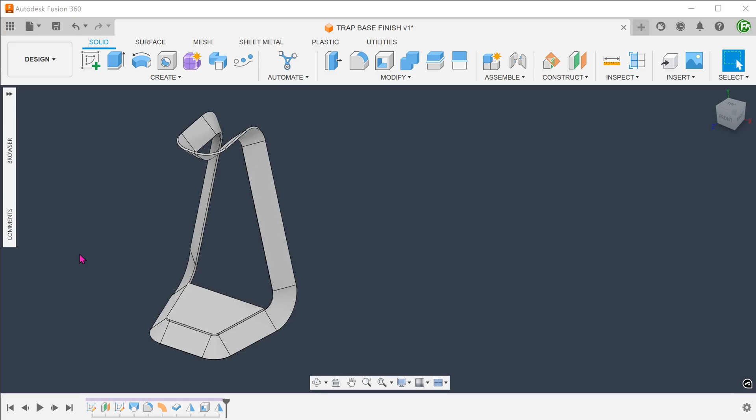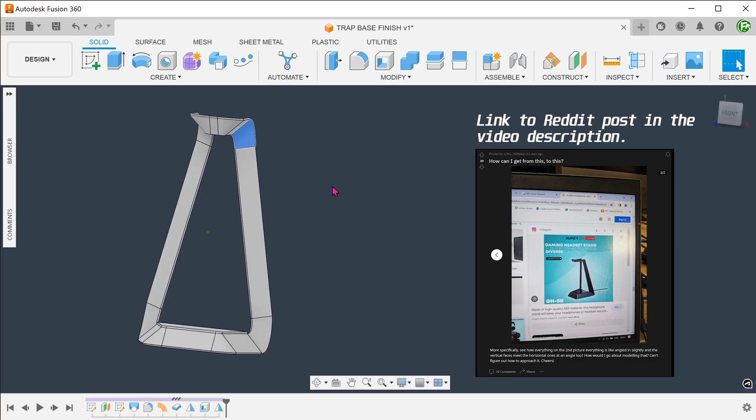In this video, I'm going to attempt to create this headset holder. The main challenges here are the trapezoidal base and these beveled faces. I'll be showing two methods here. Both these methods can only create an approximation of the shape shown in this picture. So do treat this video as an open discussion.

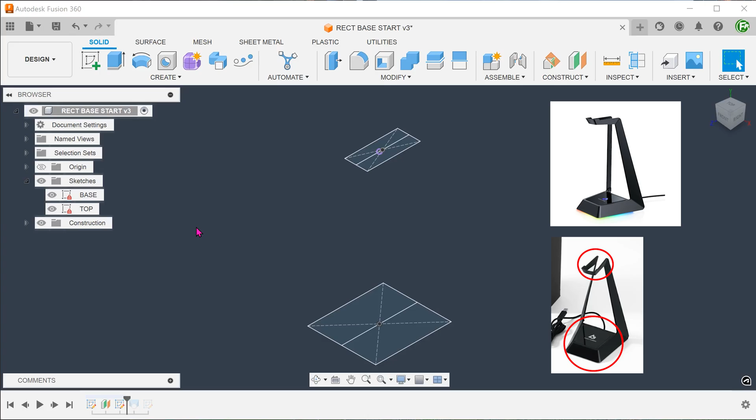For the first method, I'm going to start with a solid loft as a main building block. It has a trapezoidal base and a rectangular top. But if you were to loft from a trapezium to a rectangle, you will find that this produces curved side faces. I decided to simplify the model by going with a rectangular base. We will be taking a look at creating a trapezoidal base in the second method. By lofting from a rectangular base, the side faces will be flat.

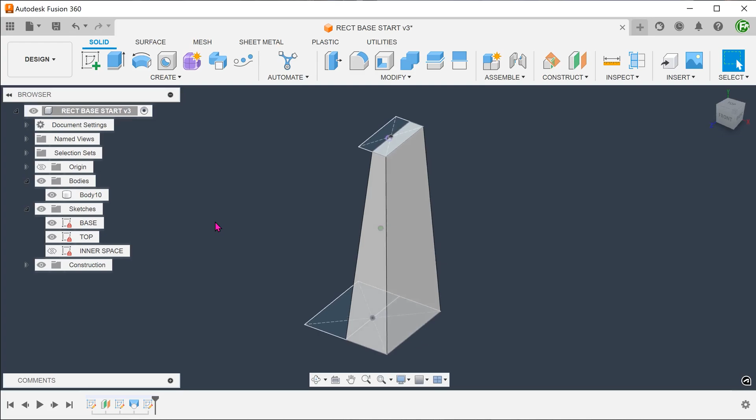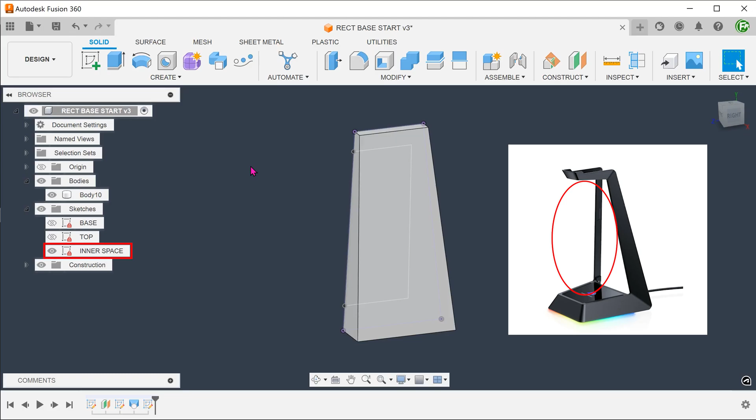It is better to create half the model and mirror, so I have created a loft here that uses only half the rectangles as the loft profiles. This is the model that I will make available for downloading. I have prepared a sketch here that defines this inside space of the model. Go to Modify, Split Body. Select the body to split. For a splitting tool, click on the Select box and select the sketch.

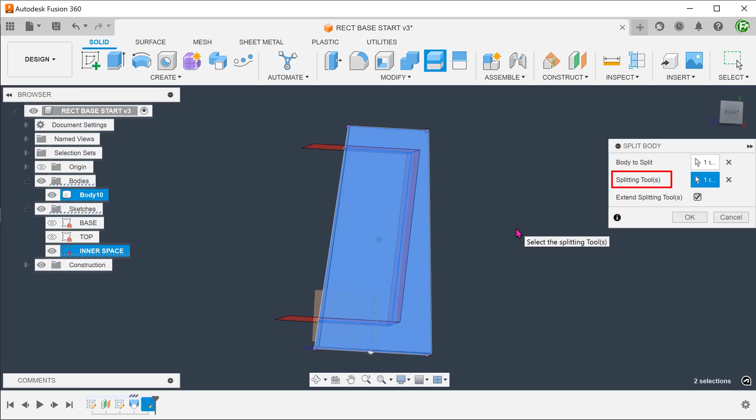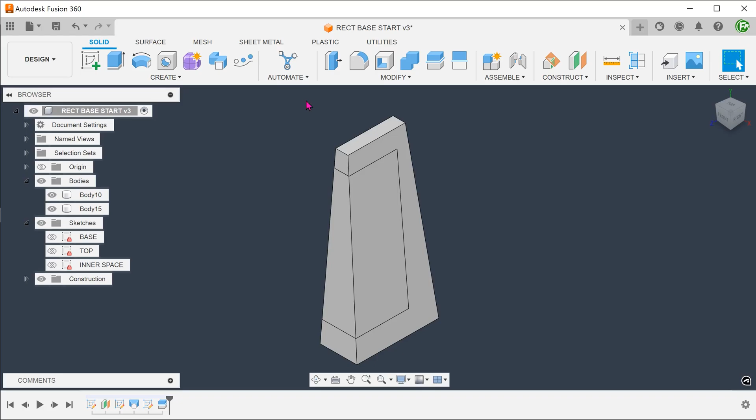In order to create these beveled faces, we will need to offset the faces of the inner split body. Go to Modify, Offset Face. Select these faces and adjust the offset. So what we have done so far is to create a framework of edges around which we will be lofting to essentially chisel out the bevel faces.

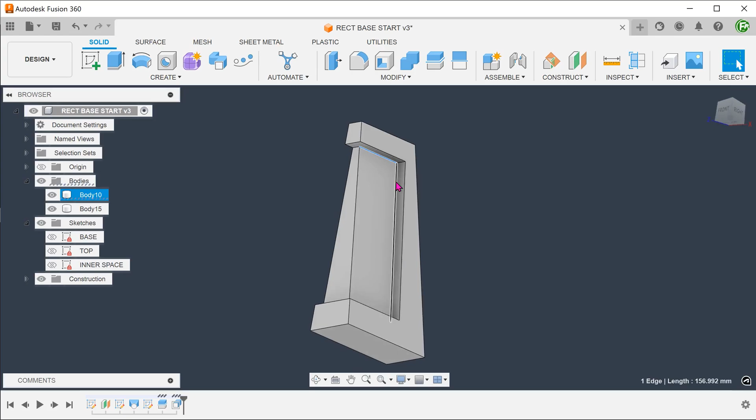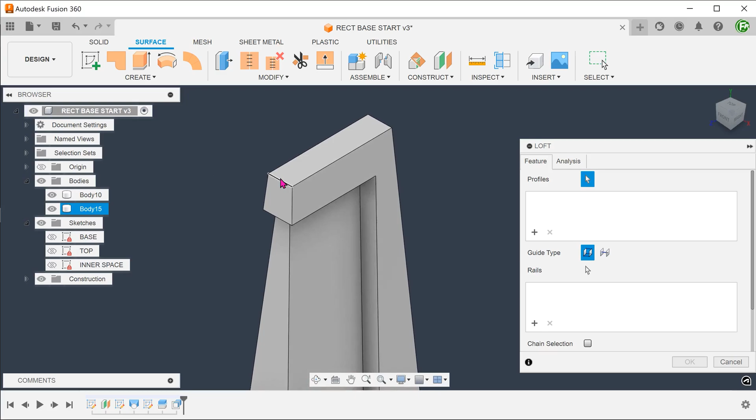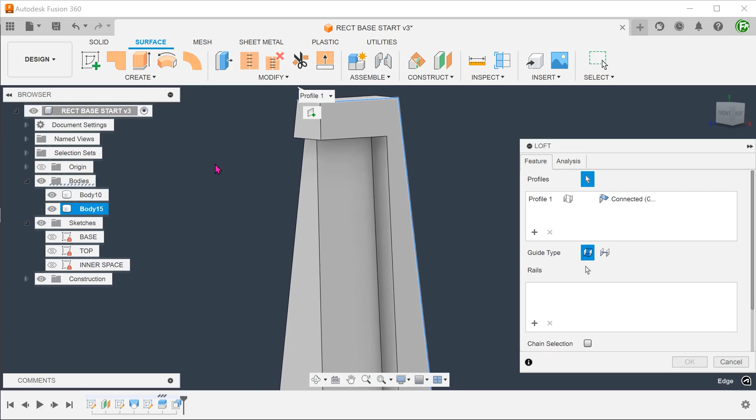Activate the Surface tab. Go to Create, Loft. Select this chain of edges as the first profile. Click on the plus sign to add a second profile. Select this chain of edges along the inside body as a second profile.

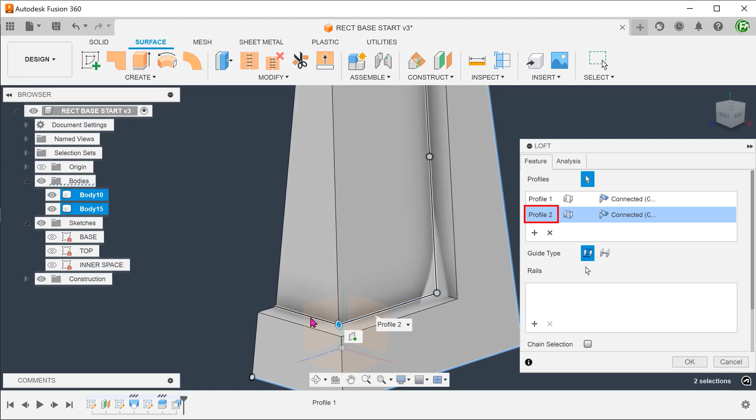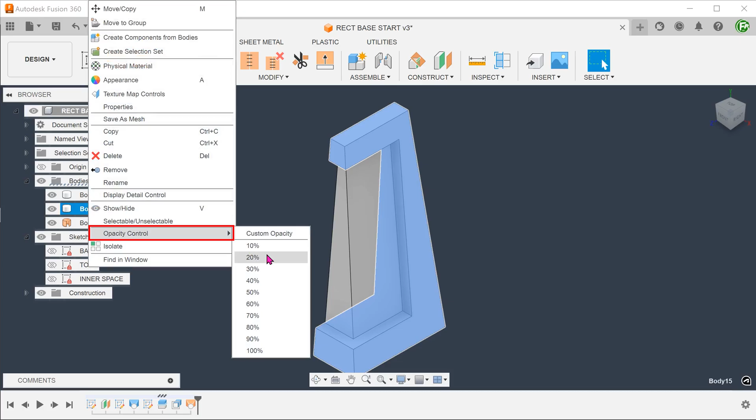At this moment, the lofted surface body is embedded within the outer solid body, so we cannot see it. Let's confirm the loft. We can reduce the opacity of the outer body to take a look at the lofted surface body. We can use this lofted surface body to split out the portion that we do not need. Another way is to use the Thicken cut.

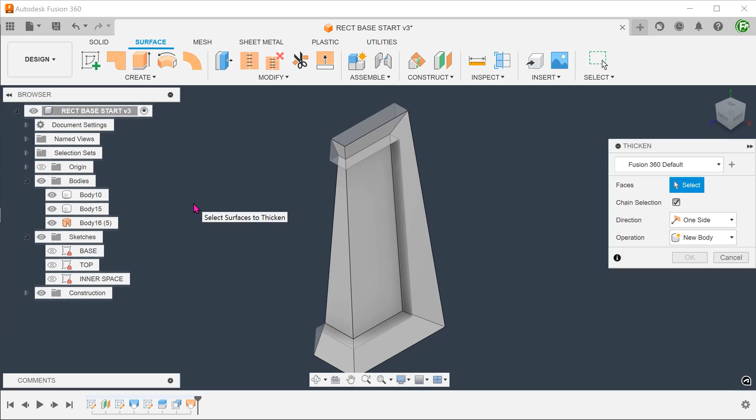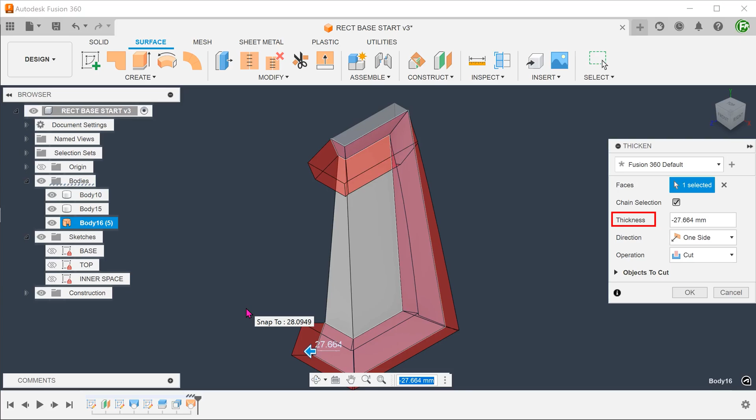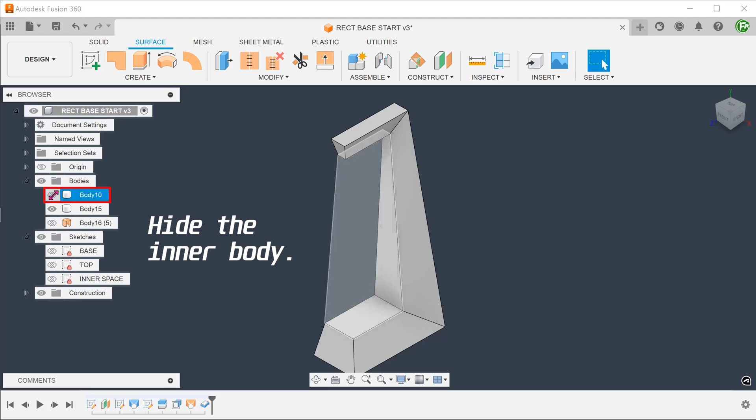Go to Create, Thicken. Select the surface body from the Bodies folder. Change the operation to Cut. Adjust the thickness such that it completely cuts through the outer solid body. Let's readjust the opacity of the outer solid body. Add fillets.

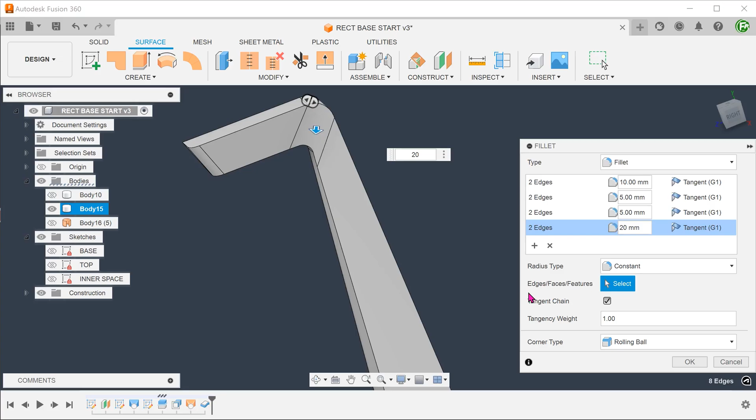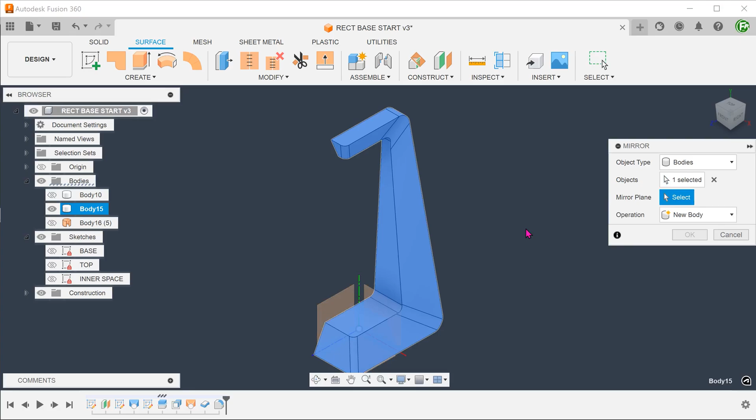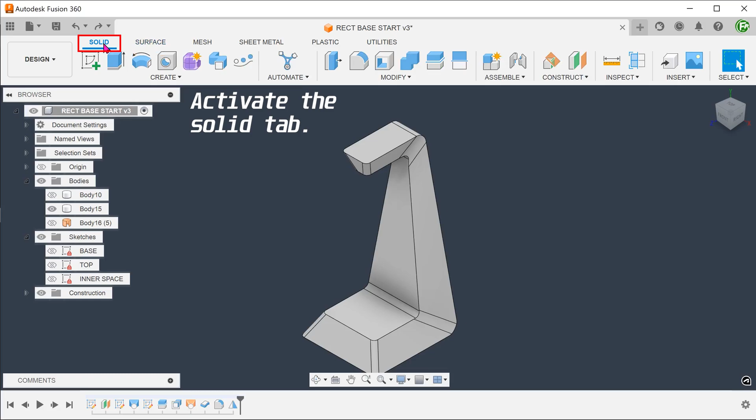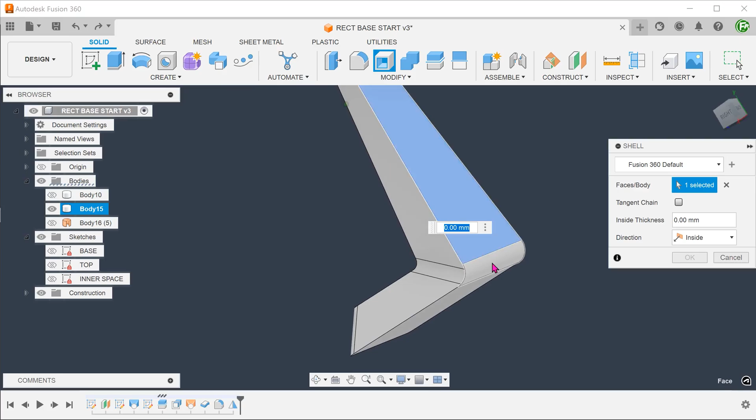Mirror this body about the right plane. Set the operation to join so that the mirrored body merges with the original. Go to Modify, Shell. Select these faces. Adjust the thickness.

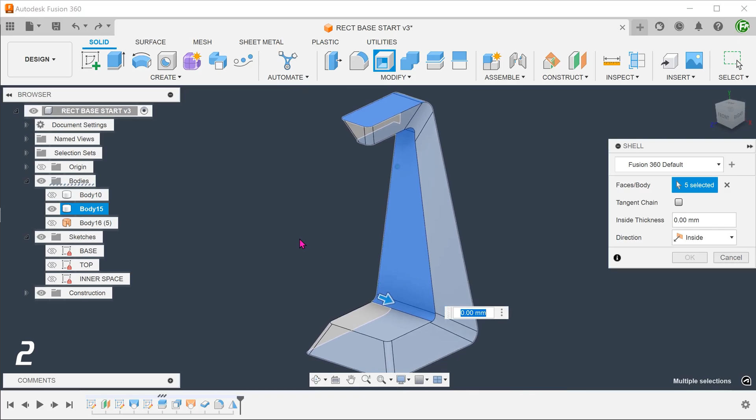So the caveat here is that the base is rectangular. Perhaps I am missing something here, and that it is possible to use this workflow to produce a trapezoidal base.

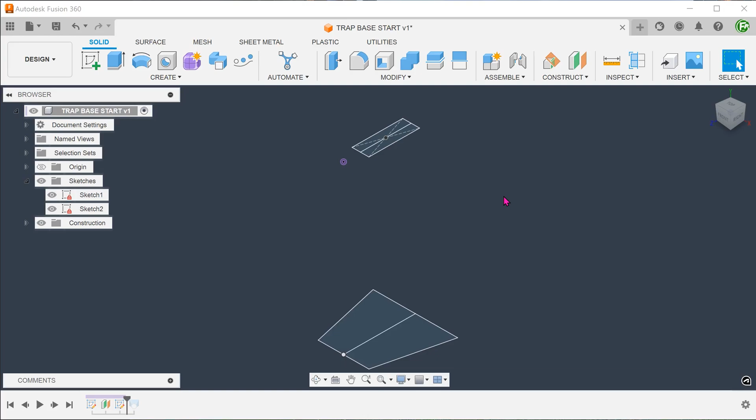For the next method, we are going to use a ruled surface. With this method, you can get a trapezoidal base, but there is a limitation which I will get to later. So I started with a trapezium base sketch and a rectangular sketch at the top. And then I made a solid loft between the two profiles. In this case, we will not get a flat face on the sides. This is not a problem, since we are only going to make use of the edges.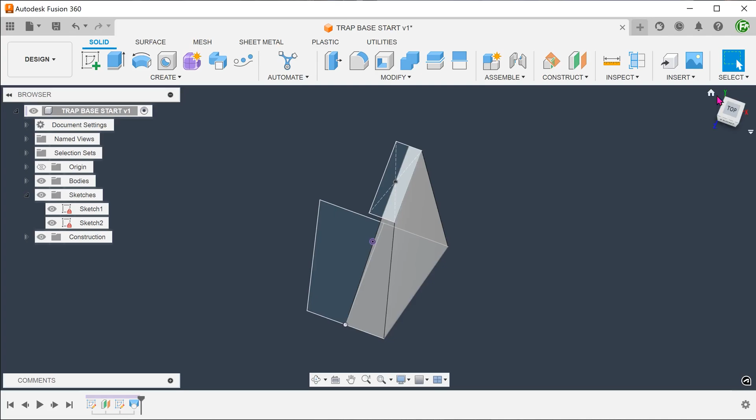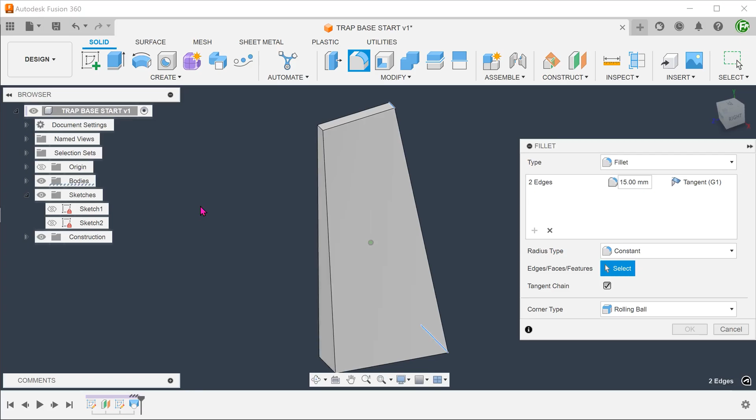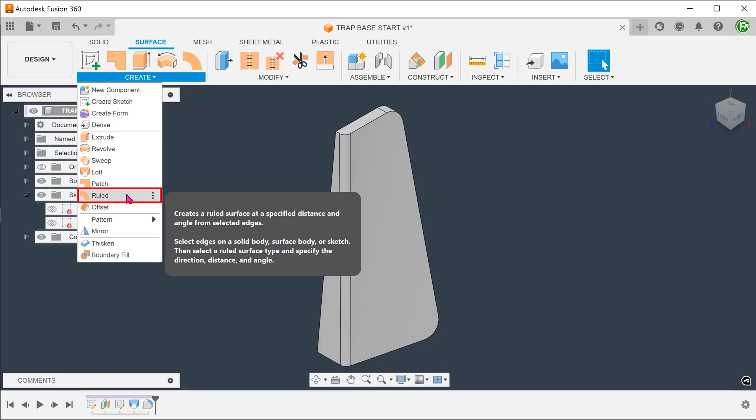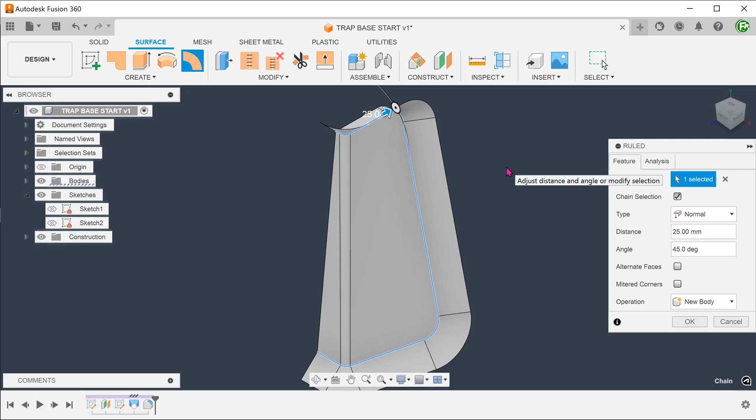Create fillets at these two corners. Add another fillet here. Activate the Surface tab. Go to Create, Ruled. Check on the Chain Selection option. Set Type to Normal. Select this chain of edges. Adjust the distance and angle.

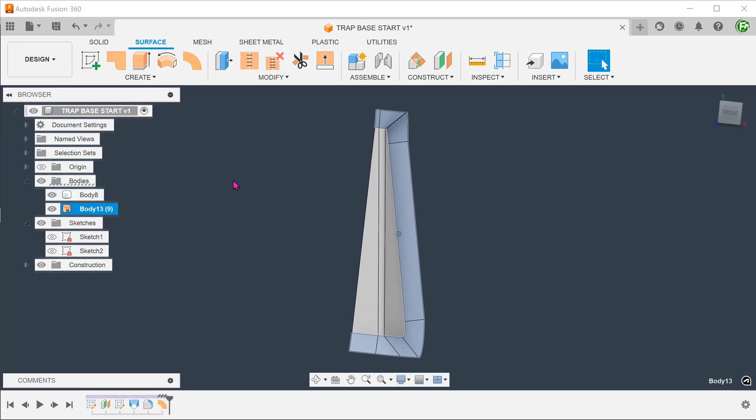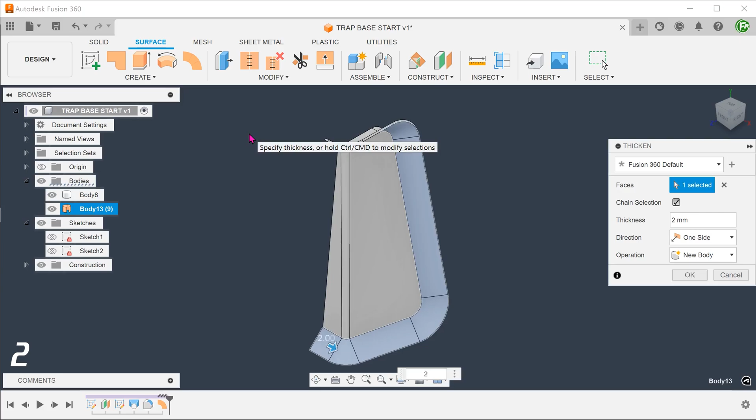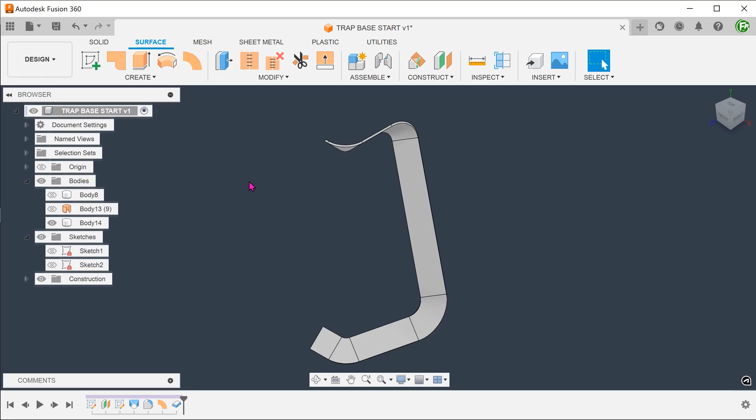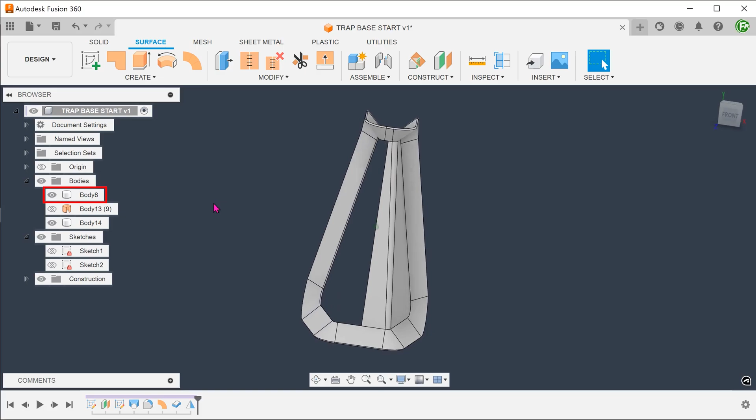From here, you can add in some extrudes for the base and the top. Or you can bring back the inner body to shell. So these two methods are a little rough around the edges. They are only able to approximate the shape in the picture.